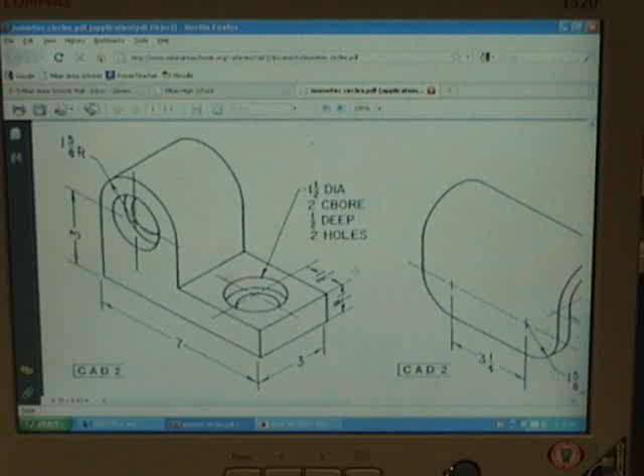Alright, we're looking at figure 564, and to do 564 it's very similar to the last one we just did. I want to start off by getting what I call the music note, or the sideways D. So I'm going to get the sideways D first, and then I'll be adding the circles and such after the fact. So I've got a 7 by 3 by 1 1/8 tall. So I'm going to come over here, I got to go to my isometric snap.

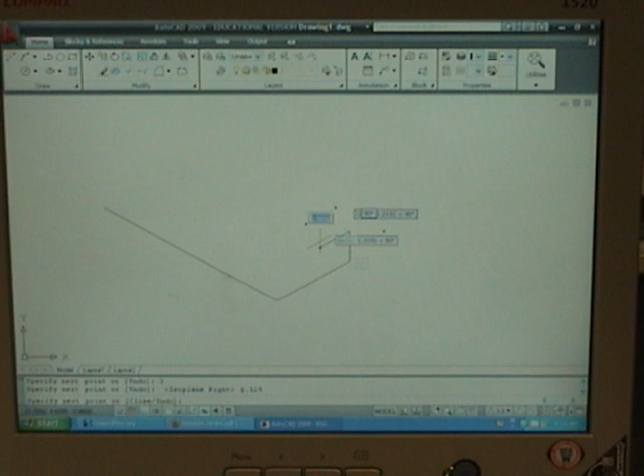I'll start off by drawing a line back at 7. I already forgot the number. We're going to go to the right at 3. And then it was 1, and I think it was 1 1/8 tall. Yep, 1 1/8 tall right there. So I will go up at 1 1/8. I'll come back over at my 3. Go ahead and come down. And I'm going to get this back edge to the part.

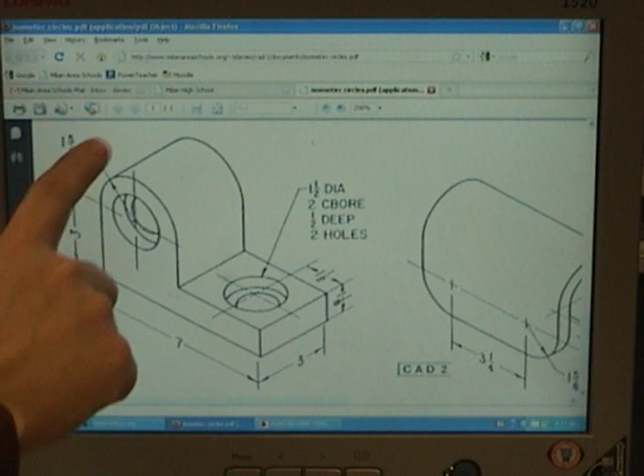The back edge says I'm up 3, but it doesn't give me a measurement across the body right here. Well, what we got to look at there is that it says that this big arc right here is a radius of 1 5/8. So if it is a radius of 1 5/8, I can do 1 5/8 twice, or I could go 1 5/8 plus 1 5/8 is 2 10/8. 2 10/8 is 3 2/8, which is 3 1/4. So that line right there is 3 1/4, or I could have went 1 5/8 to the center point and then another 1 5/8 to the side.

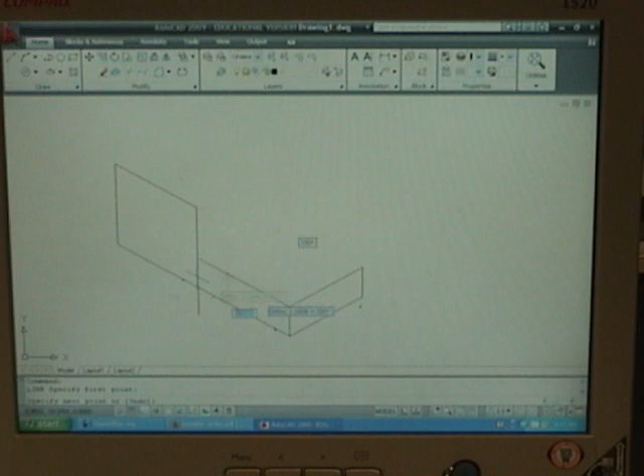So I'm going to go up 3. I got to Control E it, come back out 3 1/4. And then I don't know how far down to go. It doesn't make a difference, because I'm just going to connect the dots over and then pull them back. I don't need to know those measurements.

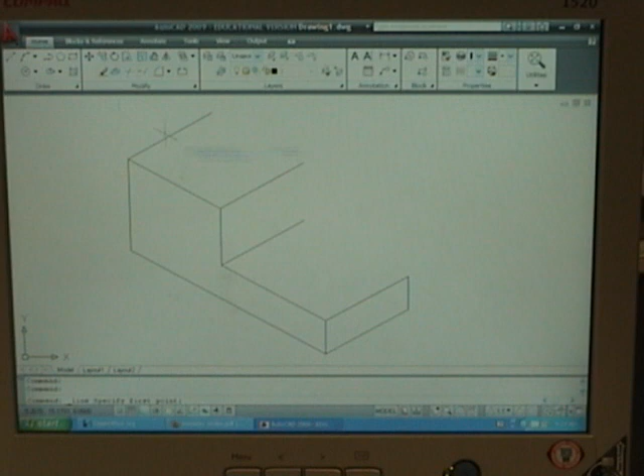Kind of like the last drawing we did, I'm going to hit copy. I'm going to copy the thickness of this part from here to here to here to here. I'll go ahead and throw in the outside looking lines. And now what we need to do is get this arc on top of the part. Well, again, we know it's 1 5/8 because we're going to come from this corner over 1 5/8 and then over another 1 5/8 to get the 3 1/4. But we really don't need to know that, but we got to draw an ellipse.

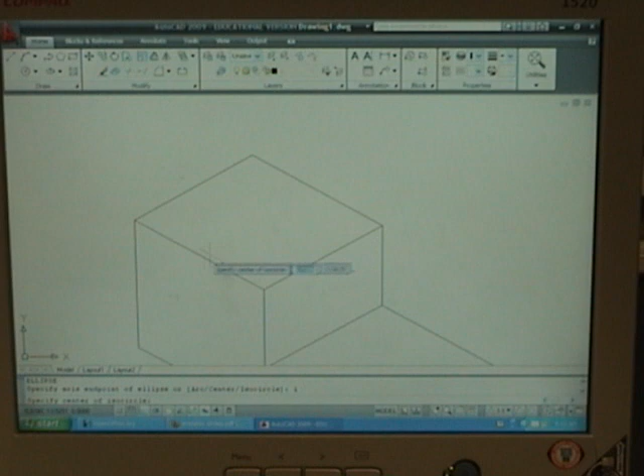So I'm going to go EL enter, I enter for iso circle. Then it says specify the center point right here. As I pull the circle out, it better be to this point right here. There is my iso circle. I'm going to copy this iso circle from the front of the part to the back of the part. And in essence, I could really come back and erase these two lines right now.

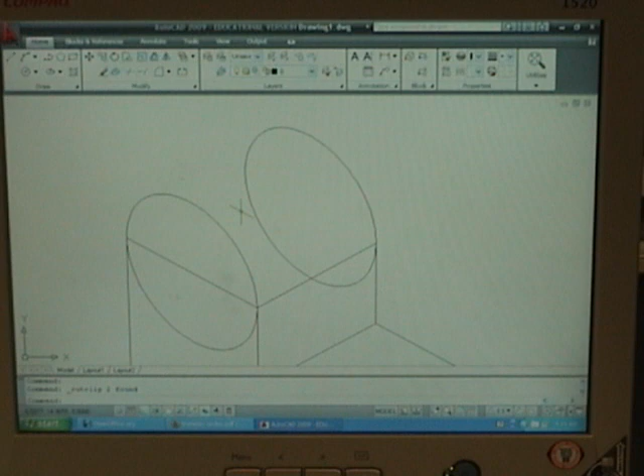We have to connect these two circles up here from the quadrant to the quadrant. And now I got to trim out the bottom edge of those circles. So I'll hit trim, select everything, and we'll get out the bottom edge of these circles. That won't be there. Now I'm going to leave this line in there only to have the center point. And now we've got to get the circle looking pieces that are on the flat part of it.

If we look in this area right here, it says we have a 1 1/2 inch diameter, a 2 inch counterbore that's 1/2 inch deep, both holes. So in other words, both of these are the same. What it says is that we've got a 2 inch counterbore that goes down a 1/2 inch. So the biggest circle here is 2 inches, and it comes down a 1/2. The smallest circle is a 1 1/2 inch diameter that goes all the way through the part.

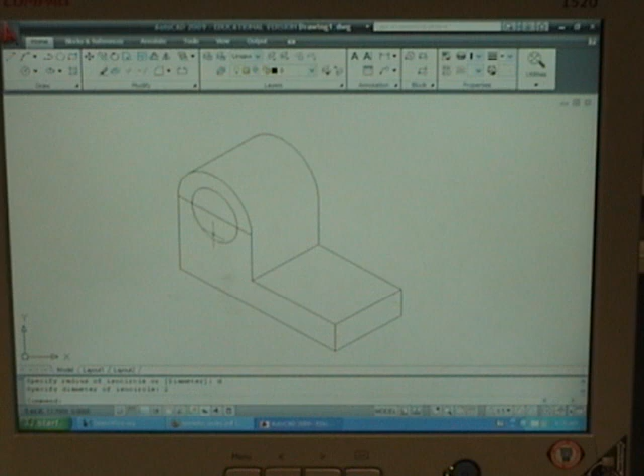So what we're going to do is I'm going to go EL enter, I enter. From here, I'm going to go to D enter, 2 enter, because we have a diameter at 2. I'm going to repeat my ellipse, I enter, and I've got a D enter of 1 1/2. So I've got a 2 inch circle and a 1 1/2 inch circle. It tells me my center point's over 1 1/2. So I'm going to come over from this point over 1 1/2.

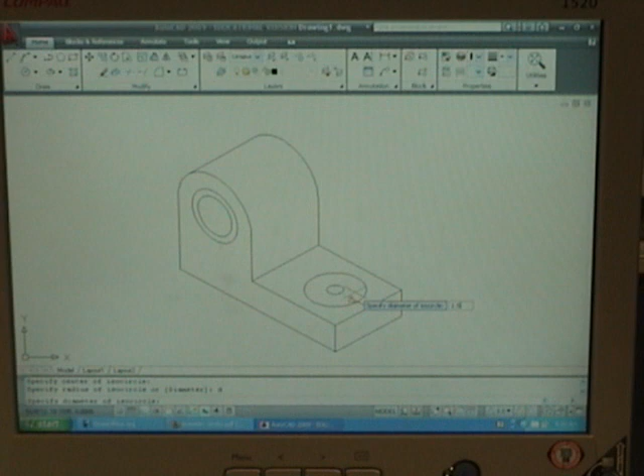And then I'm going to do EL enter, I enter. I got to Control E it to do a D enter at 2. I'll repeat it. I got to do an I enter from here, D enter 1 1/2. So now I've got my 2 inch and my 1 1/2 inch circles on each one of these parts here. Well, once again, when we went back to the actual part, it says that the 2 inch circle was down 1/2 inch. So what we have to do is copy this circle right here, both of them, down 1/2 inch.

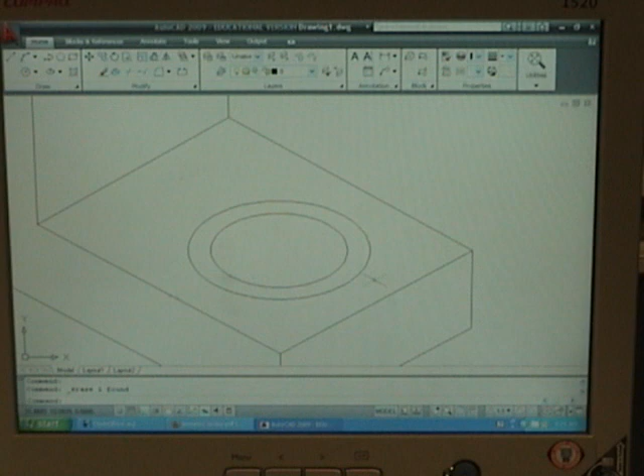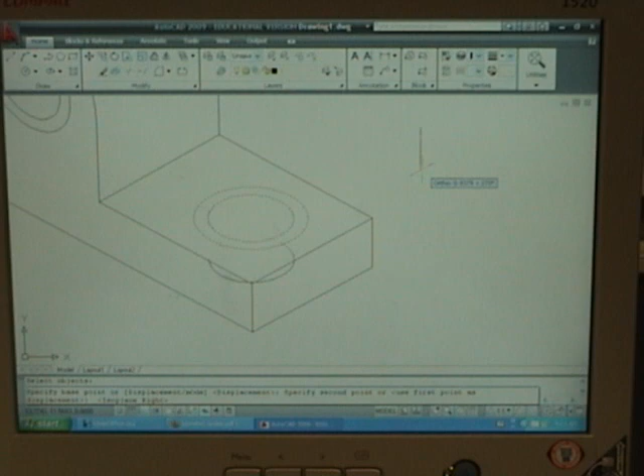So I'm going to go to copy. Select objects, I'm going to select them both. Right click. As I specify a base point, we can be anywhere on the screen here. Left click, and I just want to make sure that it's going straight down, and it's not, so I got to Control E it to go straight down, and it basically says how far do you want to copy it down. 0.5, enter. Now it looks a little funky still, because really this top small circle is not there, and now I need to trim out the bottom halves of that circle. Now that shows you the 1/2 inch depth for these circles.

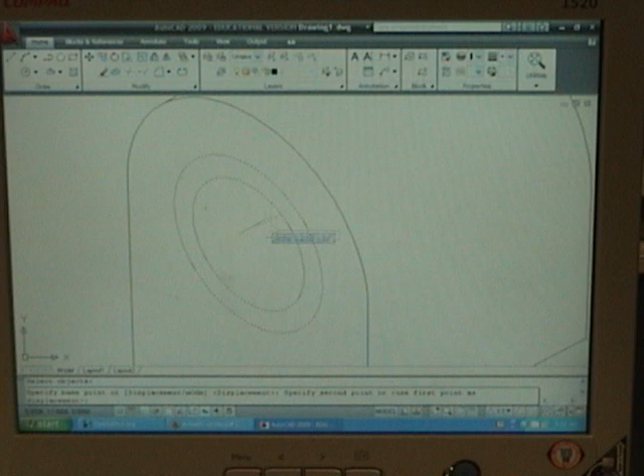We got to do the same thing here. I'm going to go to copy these 2 circles. You can click anywhere on the screen. I'm going to go back at 1/2. I'm going to erase the small circle off the top part, and then I will trim the outside. So right there that shows 564, the circles and the depth, and 564 is completed.